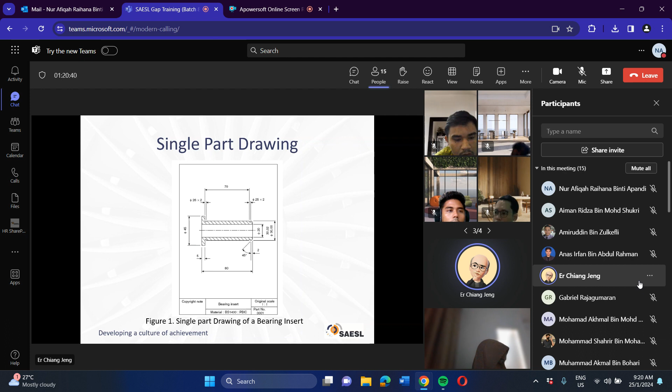The other information, to me, may not be very critical, like your scale, for example. And then, of course, a single part drawing number is also usually the part number for the item, usually. So there's no need for you to rename it a different part number - the drawing number usually is also the part number. These are some of the key points I want to highlight. Make sure you're familiar with them.

An extension of a single part is a collective - in this case, a collective single part. You'll find that it's only one single item; the only variation is the length. There's no need to reproduce the length all the time in 10 different drawings - just put it all into one drawing, then specify the length based on the part number and the length.

Let's move on - then you have also other forms of drawing like assembly drawing. This is a collective drawing - again, a collection of different sizes, conceptually the same. The shape generally is the same; the only variation in this case is the length. The grip length and the length of the bolt is different, but the diameter is standard.

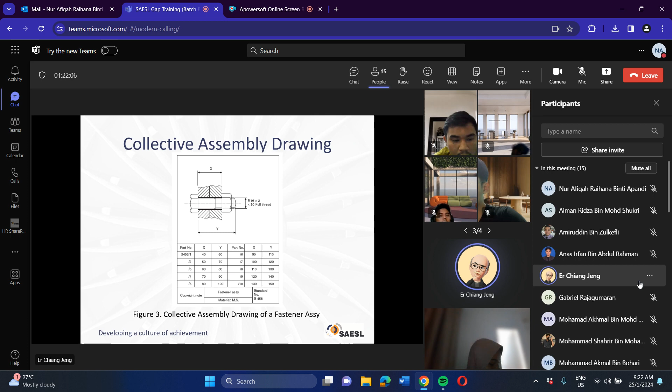So if you buy a bolt, you want to know what is the grip length, what is the length. There's no need for you to reproduce everything - in this case, I've got 10 different parts, so there's no need to do that for standard parts. If it's non-standard, then you have to specify very clearly, but even for non-standard, you can actually specify here.

This is what they call a collective assembly. A combined drawing simply means combining different types of drawing into one. In this case, I have an illustration of an electronic block diagram, which combines with a single line kind of diagram.

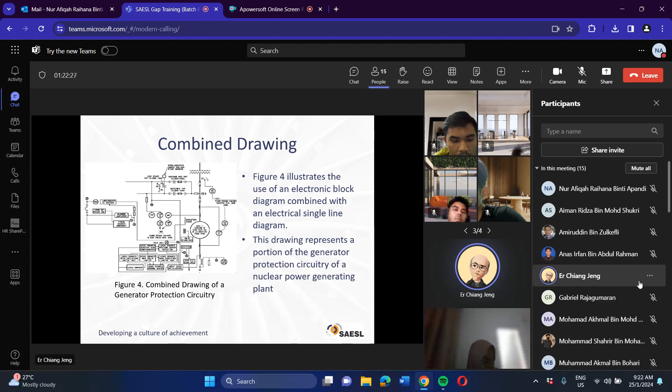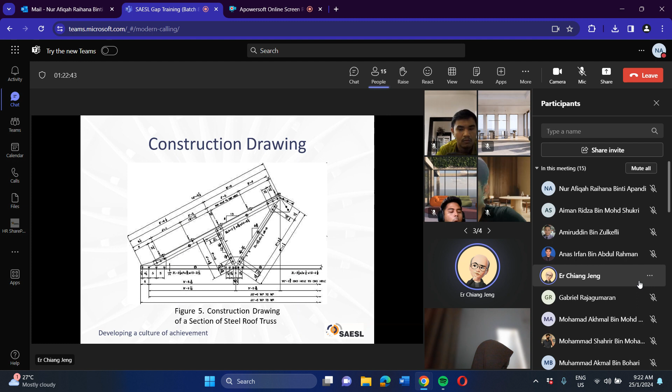Okay, for those who are in electrical avionics, you are more familiar. So there's a combine, and then finally construction, right? So to construct something, you need to put everything together in the right place. Dimension is still critical, from where to where, for example. Where you need to drill the hole, where you need to fix the screw, where you need to do your welding, all that can be specified here. Okay, construction.

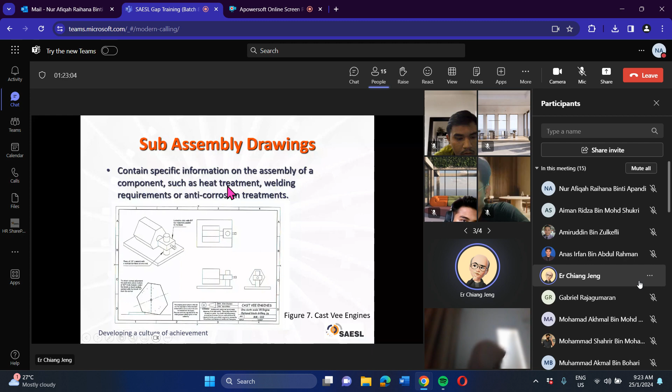So the other examples. Sometimes assembly diagram in another form may be called installation drawing, because you need to install them, you need to install certain parts. For example, you still need to know the dimension, where exactly it should be located, and how high from certain location. This may be critical, especially on aircraft. Sometimes you need to have clearances, gaps, and all that you need to adjust. Installation drawing will come in.

GA drawing is a term they use, as the word says, general. So it doesn't give you much information, but it gives you an appreciation on what goes where. For example, if you are trying to illustrate an aircraft, this may be good. You need to introduce the person to the various parts of the aircraft, where the wings are, where the vertical stabilizers, horizontal stabilizers are, where is the engine located, because if you are looking from outside for the first time, you don't know where's the engine. What is inside the cockpit, where is the radar, and so on. So these are all general arrangements, a general profile of the major parts of an aircraft.

It only gives you an appreciation, but sometimes the first appreciation is important. You can buy a car, you can buy a motorbike. The first thing you want to do is get the general appreciation first, before you start looking into what's the engine made of, what's the horsepower, and all that. First impression is very important.

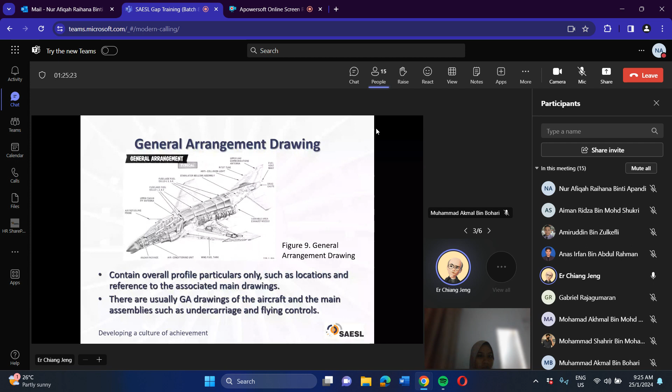But if your girlfriend sees a car that doesn't appeal, maybe you'll move on, but first impression is very important. Imagine the difference between a Lamborghini and a box-shaped car that looks like a delivery truck. Nobody would appreciate that. But if you're a businessman, then of course it's different, you need to deliver goods, so you'll be looking for that kind of profile. This car looks like it can carry a box that's 10 feet tall, that's what you're looking for, not a Lamborghini that is low and road-hugging and shapely. No, that's not what you want.

So GA has its own advantage. Then of course, if you assemble a part, then this sort of drawing will be very useful. You know exactly where the part goes in. On the outside, you can't see anything, what goes on inside there.

So this is what we call, if you look at this drawing, basically it looks - later on you'll see in your different sectional views - this is what we call a half section, because it's cut exactly into a quarter. A quarter of it has been removed, so you can see not only the outside, but also appreciate the inside. These are good if the parts are geometrically symmetric, more useful. If it's not geometrically symmetric, then maybe a cutaway view would be better. Some people may mistake this for a cutaway - it's still a cutaway view, but the terminology used is different in our drawings.

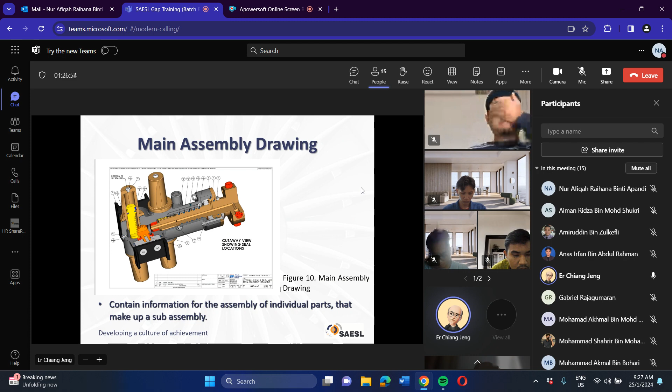Because you have to assemble on your own - your chair, your table, your cabinet, right? They always come with a drawing, an exploded view, so it's a bit idiot proof. I look at it, you should, but don't take it for granted. Even for computers, which I used to assemble on my own.

Sometimes the parts and the drawings don't quite match, right? So the screw sometimes could be the wrong size, the bracket sometimes could be in the wrong position. So when you fit it, you may have a bit of a problem, and you have to use your ingenuity to modify it - but not on our engines.

If you are not able to fit any part, as a general rule, do not use force. All the parts are designed with great precision. If you cannot fit it, very likely it is a mistake. Do not use force, right?

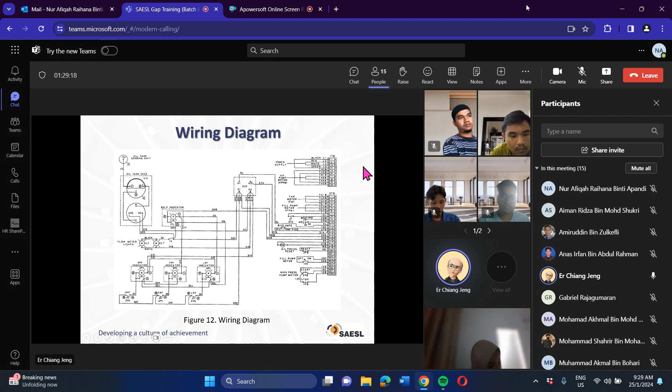Okay, there are other types of drawing you can read through, typically for the electrician - electrical guys, wiring drawings. If you are a mechanical guy doing A and E, very likely you need to read this, this is what we call a circuit diagram. Very good for explaining how the system works, very good for troubleshooting, so you need this.

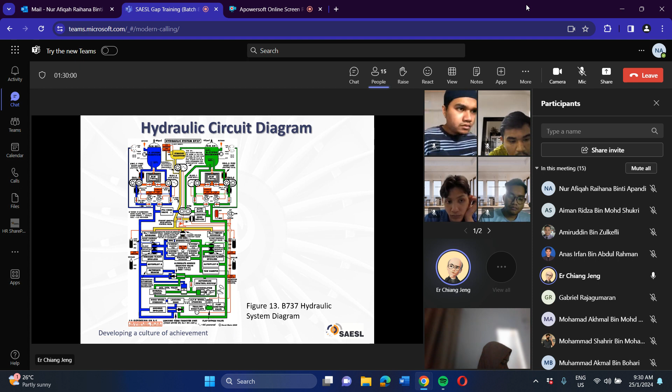If you are troubleshooting an aircraft and the pilot complains that there's a problem, then you need to be able to use this and do troubleshooting. When I say troubleshooting, it means sometimes you may have to either replace a component to try out, or you have to blank off certain areas, check for leaks, and so on.

Very useful, right. Then we're going to talk about two very important projections, isometric and orthographic. This one you must know. We'll give you some practice on this - a lot of practice, not just some. So in terms of projection methods, you can think of it as two types: first is perspective, and one is parallel.

What is perspective? If somebody asks you, can you give me a perspective of the world today - the way we look - you probably put on your glasses and scrutinize all the events that happen, visually. Of course, you can also use your ears and listen to your radio, but that radio information gets into your ear, travels to your brain. Your brain is the one that deciphers all this information, physical, visual, audio, and then you have a perspective of what is happening. Right or wrong is another thing, but when I say perspective, I mean what you see.

So in real life, an artist's painting is always perspective - what he sees, he paints. He paints the scenery, he paints a portrait, usually from what he sees. Perspective view, generally. Whereas parallel is different - for engineering, we normally use parallel, because what you see is not what you see visually. Your brain will say yeah, this is correct, but it's not exactly what you see. I will explain this in a bit more detail later on.

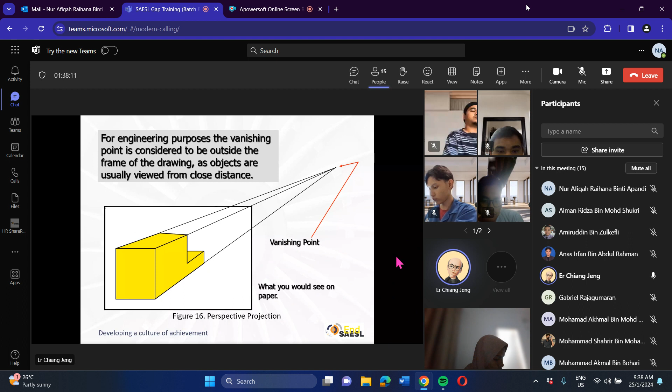So as you can see here, the front face of the object is parallel to the picture frame - the front face here, parallel to the frame. But this one is not parallel, it vanishes, so it's tapered in a sense. There are some important points to note: in reality, you cannot go and locate this point far away and then put it in a drawing. It's difficult. So maybe in a drawing, you just make some assumption that this point is here. But when you draw the picture, it looks something like that, because it's only the area of interest.

Then of course you have your isometric. Isometric is also 3D, but you will find that the front face is aligned - this is the front face, or this is the front face. It will be aligned at 30 degrees to the horizontal. And the other property is all the lines are parallel.

Okay, so this is a variation. This baseline must be 30 degrees. No other standards, so isometric is standardized to 30 degrees. This one you will take note, very important. For sketches, you don't bother, you just go roughly, but in your engineering drawing, this has to be 30 degrees.

Okay, this line here, this front face is parallel to the frame, but your receding lines are not. But having said that, they are parallel. They are not as in the case of your perspective drawing, where we have a vanishing point. This one doesn't vanish.